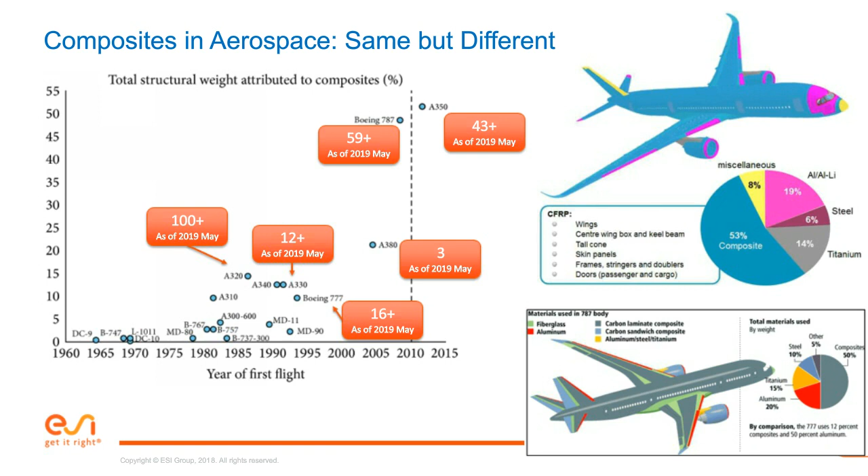Now, I know that sometimes when we talk mass production, and compare automotive production to aerospace production, a lot of times people say it's still a small volume, right? A typical automotive plant is finishing 1,000 vehicles in a day, and a typical aircraft has yet to see 1,000 aircraft being shipped in a year.

But some of the new aspirations of the industry when it comes to the future of flight and aviation, we see already at last year's CES, I saw at least about 10% of the show floor in the automotive and transportation area was dedicated to Bell Flight, and they were showing off their Nexus Air Urban Taxi concept, a vertical takeoff vehicle that they're promising maybe someday will be the Uber of aircraft, a way to ride share and get airborne transportation mobility down to anybody who has enough time to load an app onto their phone and schedule themselves a ride.

Now, maybe that's just a few years away still when you talk to folks about the reality of that. But what that means is that if we're going to turn the corner and start seeing this urban air taxi and personal air mobility happen, we're going to move from traditional volumes of aircraft, where we're talking about high double-digit volumes or hundreds of aircraft a year, to talking about the potential for thousands and tens of thousands of these aircraft having to be manufactured each year. And that's going to mean a land shift is going to happen in the composites manufacturing space.

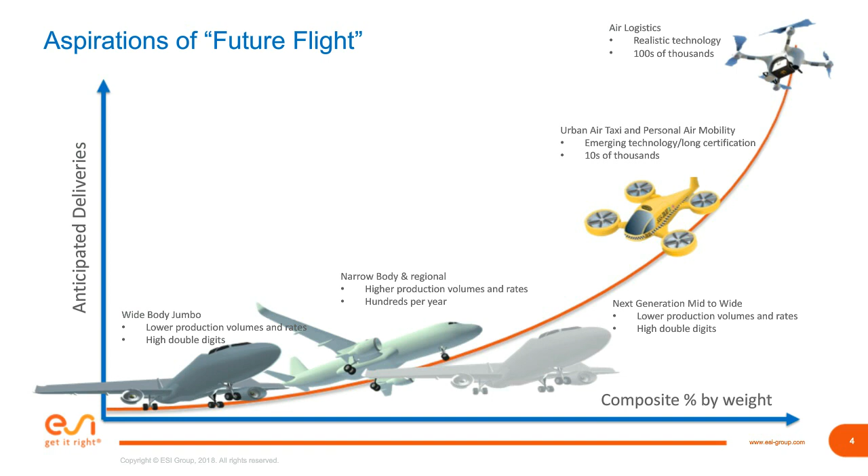And we're talking for them hundreds of thousands of potential aircraft a year, carrying around anything from a 25-pound to a 75-pound payload. And that's really going to make the composites manufacturing industry really have to step up their game in their ability to automate and mass produce those types of products.

Now, a lot of the folks I talk to in automotive, they say, well, you know, composites are cute. They're really nice for those niche vehicles, something we sell on the volume of a Corvette, something we sell on the volume of those Vipers or those GTs, right? Those vehicles, sure, we'll make them out of composites.

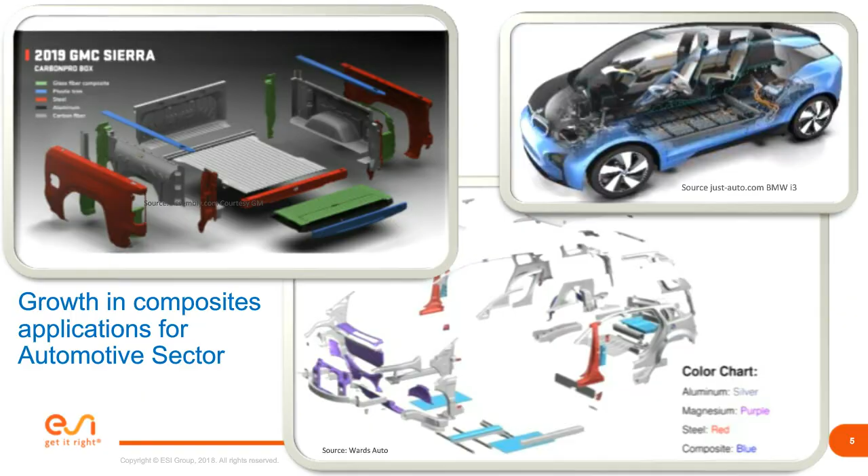So one of the things that we're seeing, as far as the overall trend that's leading to this growth in the composites manufacturing market, is that the previous barriers to wider adoption are shifting. We're seeing an increased need for composites in the mass markets, whether it's mass market aviation or this automotive scale of manufacturing.

We are also seeing that the cost-benefit ratio of making things out of composites is increasing. In an internal combustion car, people might say the value of shaving a kilogram off the car is approximately 50 cents to $1 per kilogram in overall value to the consumer. In the aviation industry, for every kilogram shaved off the airframe, we're talking about $5 to $50 per kilogram of value.

What we're seeing is the convergence of those two numbers getting closer to each other, so now in the automotive industry, as we move towards greater electrification, there's much more financial benefit to the car maker for shaving that weight.

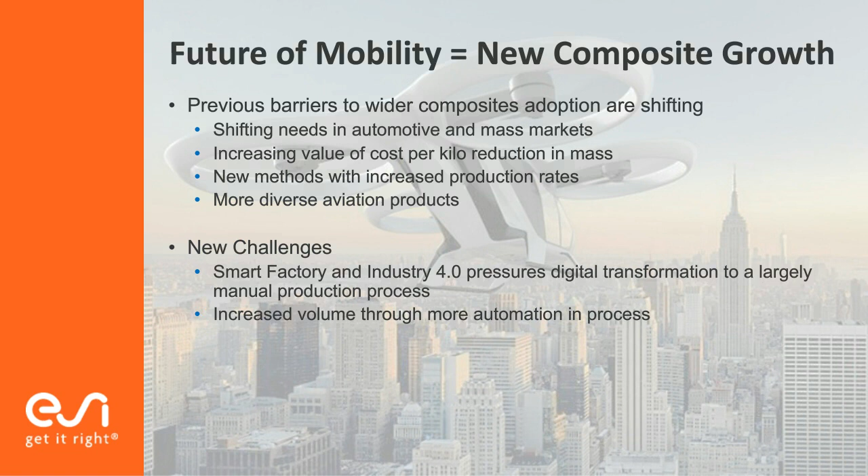It turns out that when you start doing this manufacturing engineering, you might find out that the way the fibers and the resin interact with each other does not end up being exactly what you envisioned for the original product design. If that happens when you're doing your manufacturing piloting, you have to go back to the drawing board and redesign your product to account for what might really happen in manufacturing.

So then they do a couple of iterations that way, building up these propeller blades by hand, manufacturing them in a manually controlled process, cutting them open to see if they actually delivered the characteristics wanted, and lather, rinse, repeat. Then you go into mass producing these propellers.

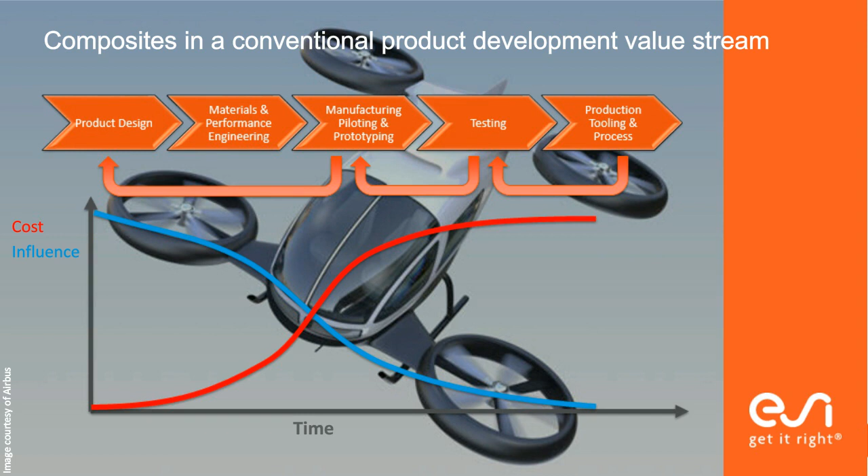So what we're trying to do is help everyone optimize their product performance life cycle. We recognize that one of the ways you try to do this is by almost cyclically or simultaneously addressing product design, materials engineering, and process.

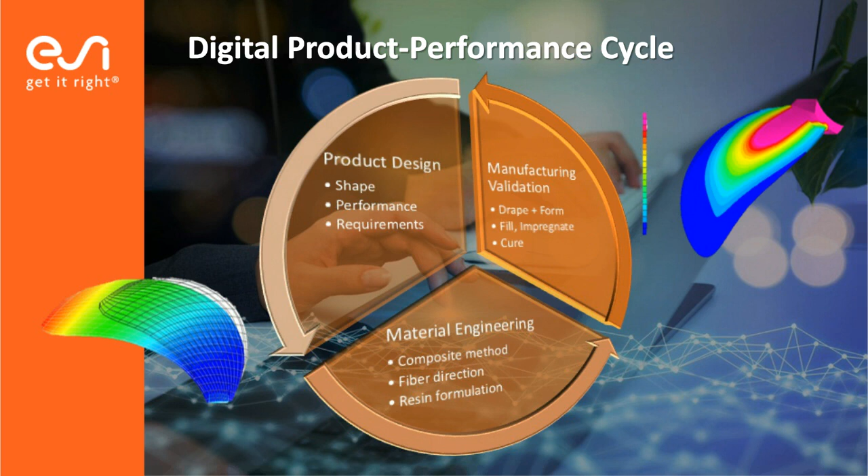One of the things we learned from our discussions with Nakashima is that they recognized that using digital prototyping allowed them to predict how the carbon fibers are being impregnated with resin throughout the manufacturing process, and were able to quickly find out if that gave them the performance results they were looking for. This really allowed them to streamline their product development process, because they no longer had to make every blade by hand, cut it open to see if it was manufactured properly, and repeat that process before they could start physical testing. Instead, they were able to achieve that all digitally.

So just a quick overview of the different types of composite processes we're going to focus on today. We're focusing on CFRP, which is carbon fiber reinforced plastic methods. There are two types of processes commonly used in this kind of manufacturing operation, and many of you on the webinar probably know this better than I do, but we'll go through it anyway.

First, there's what we might call pre-pregged or pre-impregnated product, where we're taking sheets of fibers that have already been impregnated, or wetted, with the resin. Those are stored in big rolls of pre-preg material, kept at a certain temperature and condition in order to prevent them from curing and solidifying into the final product.

Then there's liquid composite molding, which you might know as RTM, resin transfer molding. Then there's compression resin transfer molding and vacuum-assisted resin transfer molding, different ways of trying to infuse dry fibers or dry fabric sheets with liquid resin to get that process.

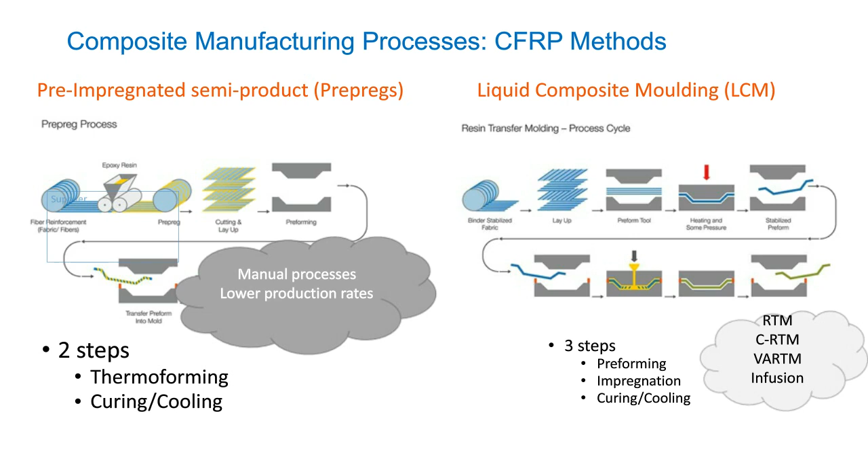This was very nice for some of our larger applications and low production volumes of certain composite parts. However, one of the challenges we face is that these processes require long-term temperature regulation, whether it's keeping these fast-curing pre-impregnated sheets cool so they don't cure ahead of time. That means for a long time we're storing those sheets in giant refrigerators and freezers in order to prevent them from quickly aging or curing to their final strength characteristics.

On the other hand, we have materials that have to sit inside autoclaves for a lot longer to reach an elevated curing temperature, and those parts are also going to require a long production time. So as we've tried to ramp up and reach larger volumes for these pre-preg type processes, it turns out that material science folks working on these new processes are always trying to balance the challenge that the materials we use to cure faster, to reach higher production volumes, are rather volatile. They're going to change in their chemistry makeup over time if we don't control their temperature properly.

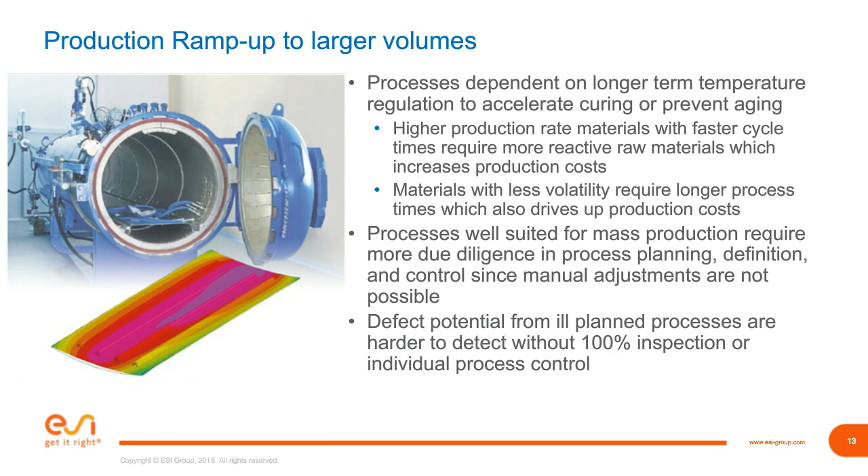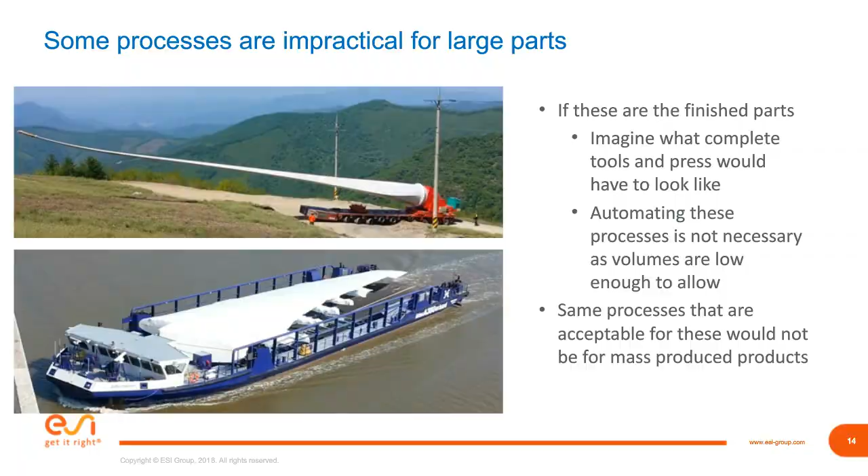So when we think about this product performance life cycle, we do have to make decisions about the materials we select and the manufacturing processes we're going to use to develop them. We have to make those decisions very, very early. It's impossible to design a brand new product with the intent to make it out of composites if we have not already validated or have confidence that the manufacturing process is even going to ever deliver those products to us, right? So if we're going to mass produce something for Airbus, right?

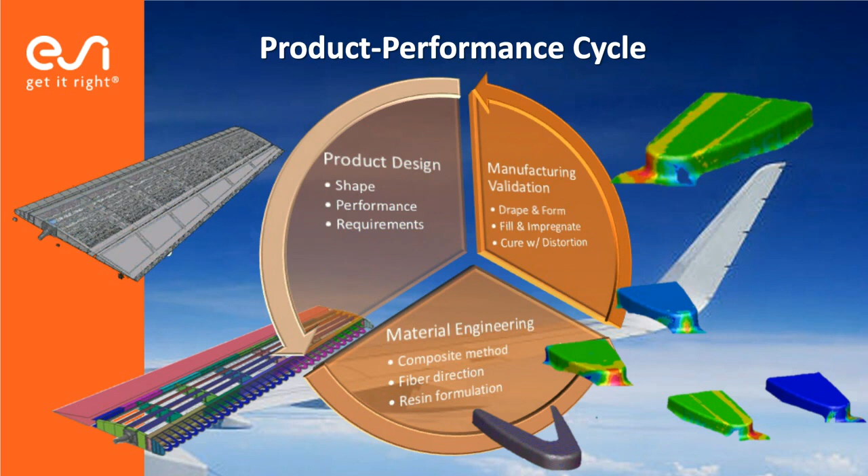So this is, I believe, a section from a wing front of an airplane. Is that correct? A wing? Yeah, right? Reinforcement strut, if you will. And so this would be the rib cage of the wing, if you could imagine. These are going to be made out of flat patterned material that would be pressed into its relative shape, and later on there's supposed to be an animation built there. I love it when a plan comes together.

But what if that closed corner was a critical attribute of that product in order for it to do its job? So whether this is a section through a wing, whether this is part of a reinforcement for a car or an airplane or maybe for one of those drones...

We really have to know, is it possible to redesign the product to accommodate this manufacturing mitigation? Because if it's not, and we know that there's wrinkling in the corners, we might have to totally rethink our entire manufacturing design as well as product design.

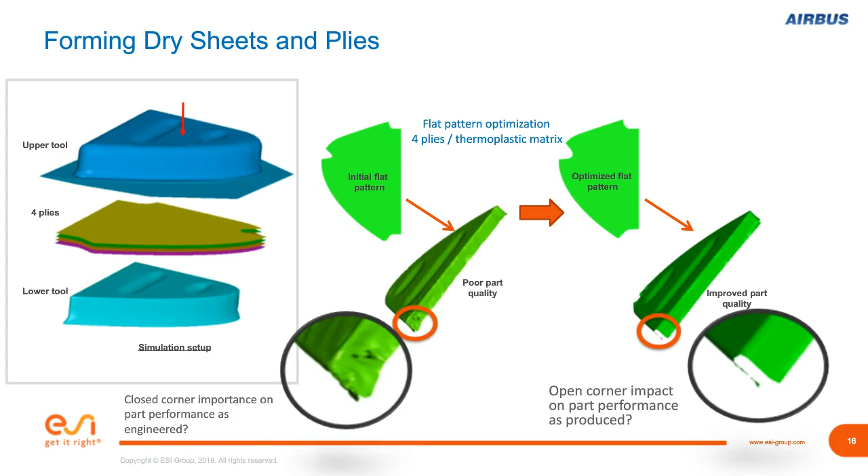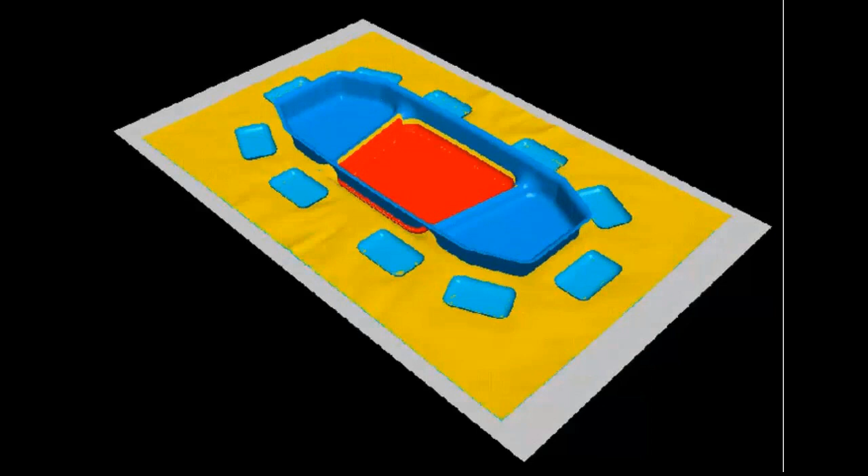So here's just a quick simulation prove-out of the forming of a wing box section. If this is a wing box section for an aircraft, we want to be able to validate whether or not the tool design for forming this box section is going to allow us to reach the appropriate shape of the product as designed.

Given the fact that we have to take dry pieces of individual plies of composite material and get them to form without having that buckling and wrinkling in its shape.

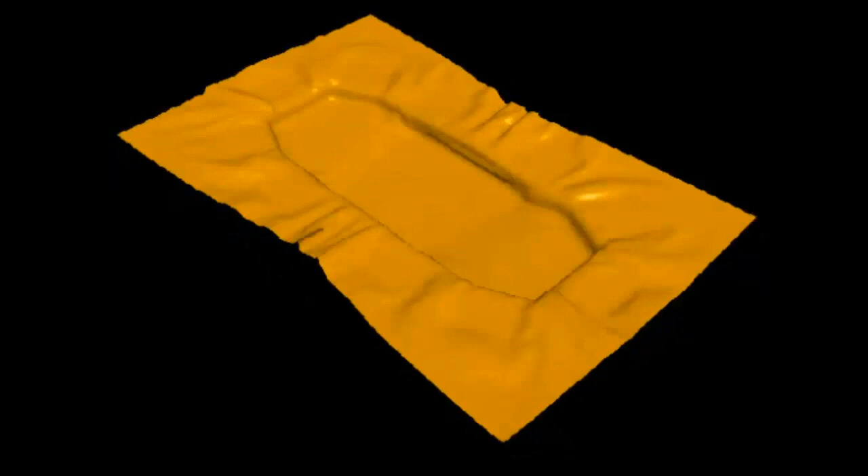That was a simulation with the tooling visible. Now we've just made the tooling hidden from you so you can see a little bit better. But in this case, we're able to validate whether or not the product characteristics, the shapes that people wanted...

A critical thing about carbon fiber reinforced materials is that not only is it the shape of the outside of that product, but also the alignment of all of those individual fibers that are woven through that entire product shape. So it's those individual plies of that product weave, in addition to the resin, that deliver the final product characteristics. And we need to make sure that those things all line up properly.

So it's important for us, if we're creating new products, that we do validate those manufacturing processes before we get too far down that product development time cycle.

Because it might get too late for us to try to rethink what this wing box looks like if in fact we can't make this out of - I was lying earlier, that's thermoplastic, thermoforming sheets, right, as opposed to dry fibers. So this would be a pre-impregnated process, right?

But in this case, you can definitely see that that wrinkling, if that's going to affect my product performance around the edges, I would have to account for that in the product design in the end.

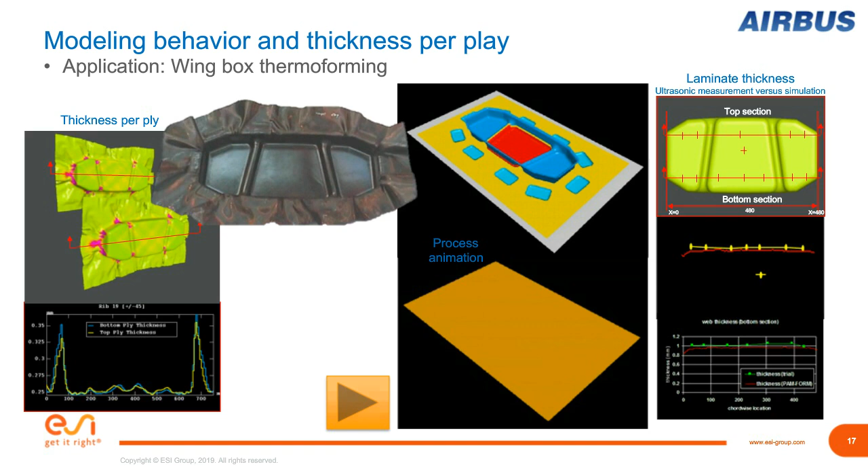So the draping and the forming of these either pre-impregnated sheets, or if this is with dry fibers, dry sheets, it's really important for us to know that we're delivering the final product characteristics based on the natural tendency of these dry fibers.

To orient themselves or to create shear in those fiber weaves. And this is a critical part of every new product design. And we have to make sure that we can prove that as early as possible.

So in this case, Airbus and the Eurocopter projects, they were taking a look at how they could try to use this as a dry fiber process, right? That we're going to later take these dry fibers and try to impregnate them with the carbon or with the resin.

And we want to make sure that prior to that impregnation, we already know what are those sheets, what are those alignments of those fibers going to be like inside of that structure.

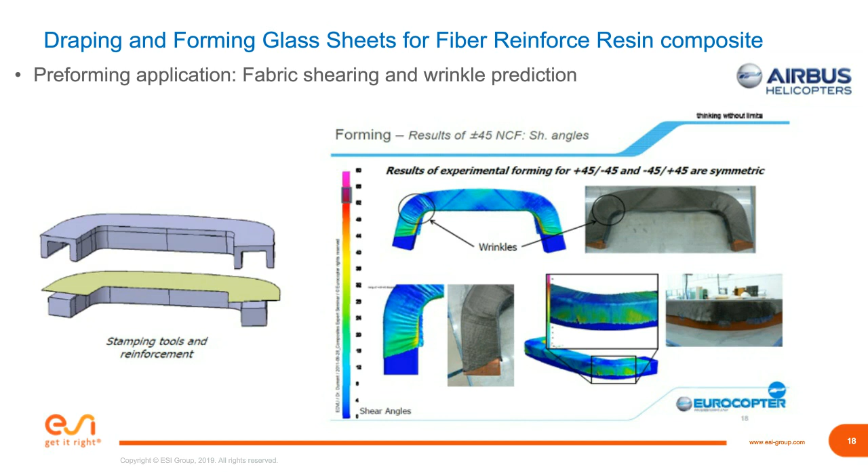So here's another example of just how we can use computer analysis to predict the behavior of those sheets during the forming process. So in this case, we have a series of dry fiber weave.

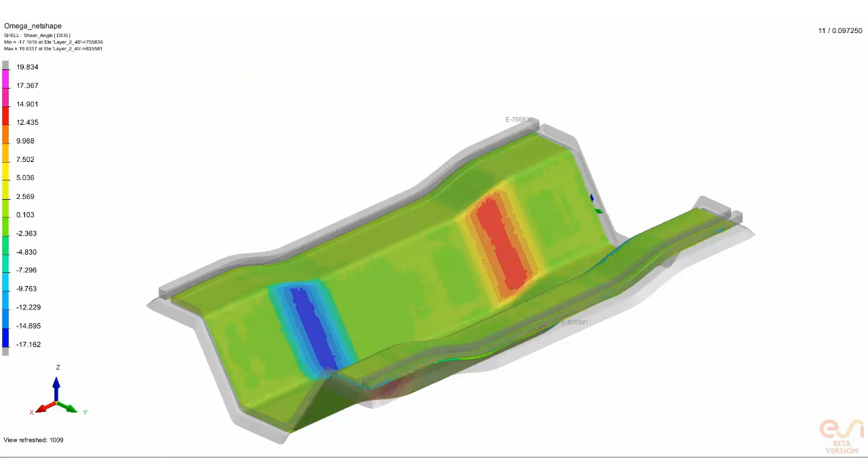Why is that running? We'll try that again. And we're going to fake it. The video is not happening right now.

So just taking a look at this still image, the idea is that we want to validate in this first step of the manufacturing process what's going to happen as we close the tools on top of those dry fabric sheets.

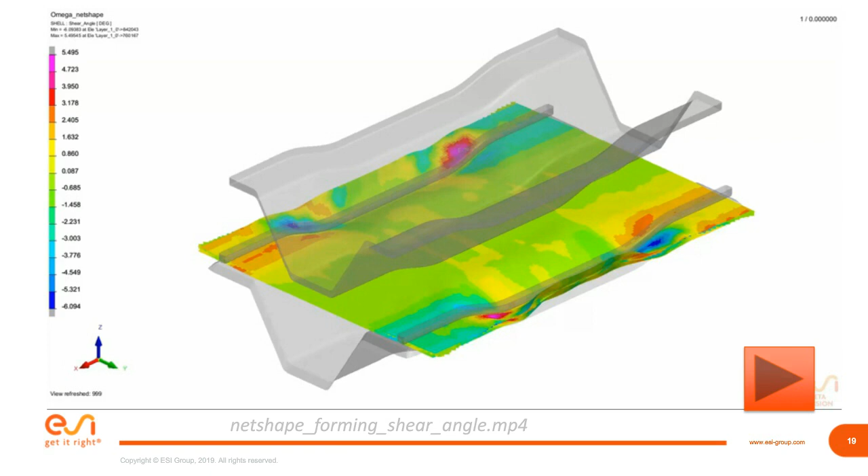So in this case, we can see already that around the perimeter of this part, we have these two, or not really straight, this little saddle shape here, that are helping control how those individual sheets of dry fabric are going to be pushed down into that cavity as the tools close.

And what we want to look out for is, in this case, now we see it, we want to see how much are those fibers shearing relative to each other during that closing operation.

Are we seeing that there's any excessive amount of shear, because that's going to change the alignment of those carbon fibers, and those carbon fibers might not be aligned exactly the way that the product engineers originally anticipated when they engineered this product. And for those minor variations in the alignment of the sheet, we can certainly see different performance of that product.

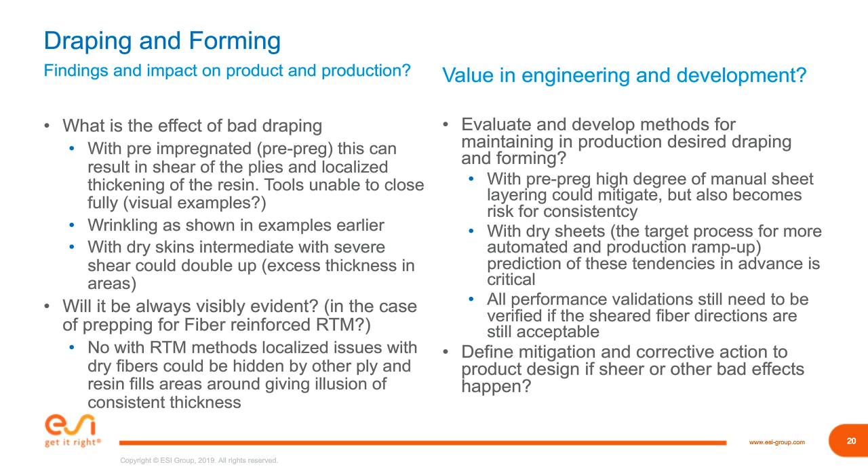So really, the thing that we want to consider is what's going to happen when we close the die. Is there going to be problems with draping, or with the way those fibers maintain their alignment? In a worst case scenario, you could even have uncontrolled movement of those fiber sheets where they double over and wrinkle up inside the tool, preventing full closure and the proper thickness distribution we were counting on. It could even keep the tool from closing and might cause the whole part to not be manufactured the way we intended.

So once we've closed those fibers and sheets inside of the tools and given them the general shape we wanted for the process, now we want to evaluate and prove out how the resin is going to infuse and wet those dry fibers in order to give us our finished product.

And so we always have to take a look at what is going to be the filling time. How fast can we push that resin inside of the die cavity, and will it fill completely before it starts to cure and solidify, forming new polymerized material that could become too viscous to actually flow through those sheets appropriately.

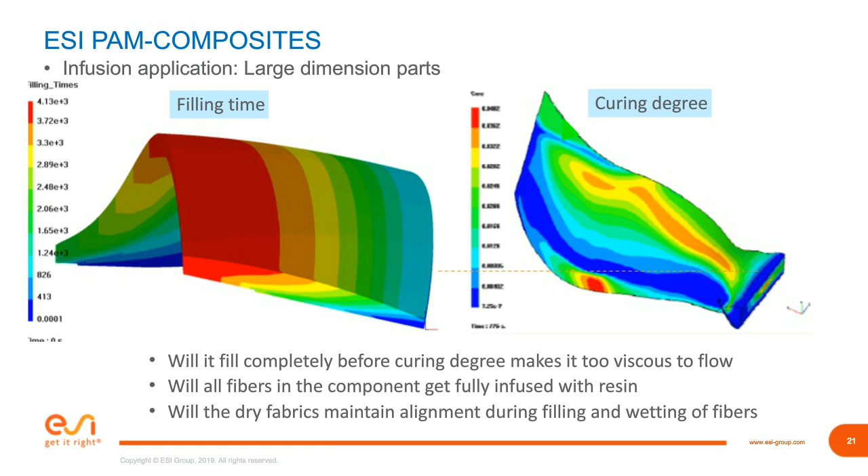So for these large dimension parts, it can become really critical to be able to predict whether we're maintaining that full flow of the resin throughout the product, and whether we're able to predictably maintain the right pressure and the right curing profile.

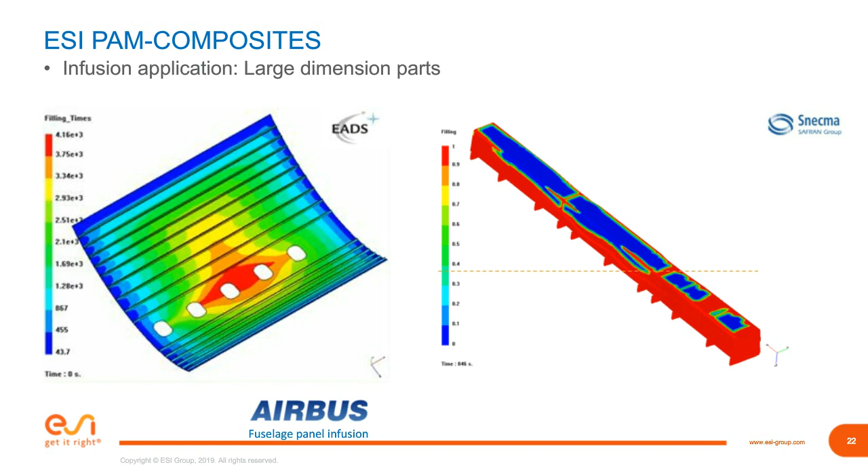So again, we're going to cross our fingers and hope these videos run properly. Here's a video of the simulation of the filling factor, just showing how the fluid filled up that entire cavity where we have the dry fibers.

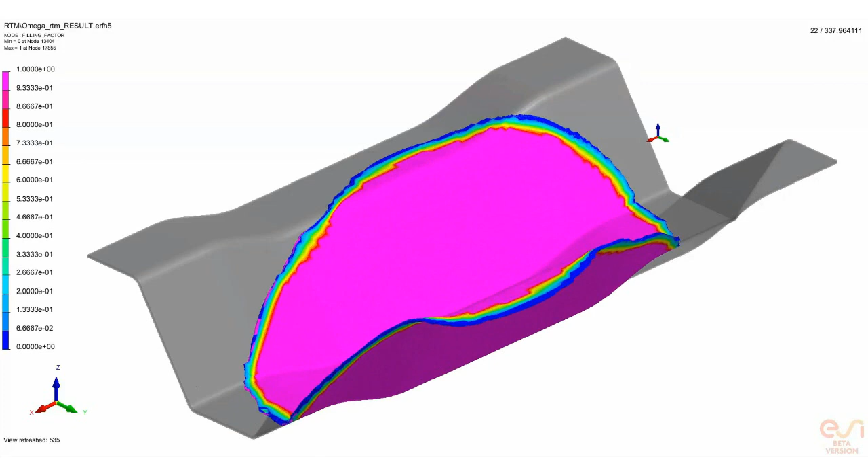So the things we're looking out for are whether there are areas in this product that are not properly being reached by all of the resin, or if it's not getting filled appropriately.

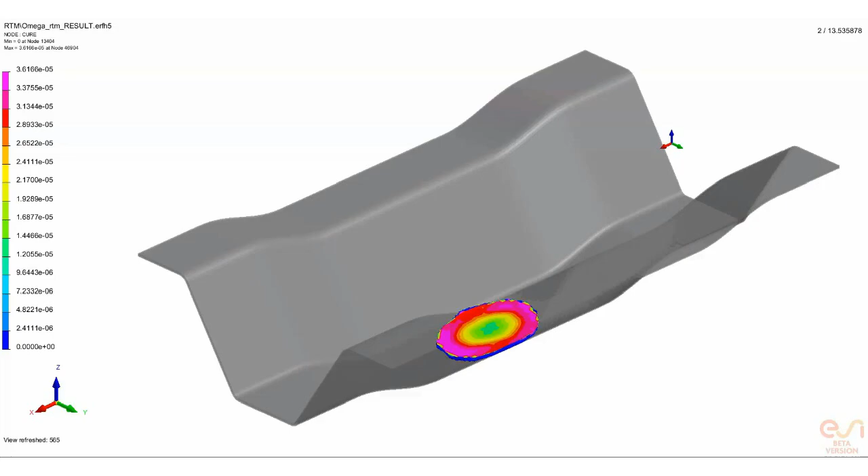This one would be the characteristics of curing. So now, as that resin is flowing in, are we seeing some of that fluid polymerize too early, creating islands or little rocks in the stream of that fluid flow? An early polymerization of that resin could in fact block the planned flow of the rest of the wet resin into that structure, which could also change our confidence that we're getting the product characteristics we want.

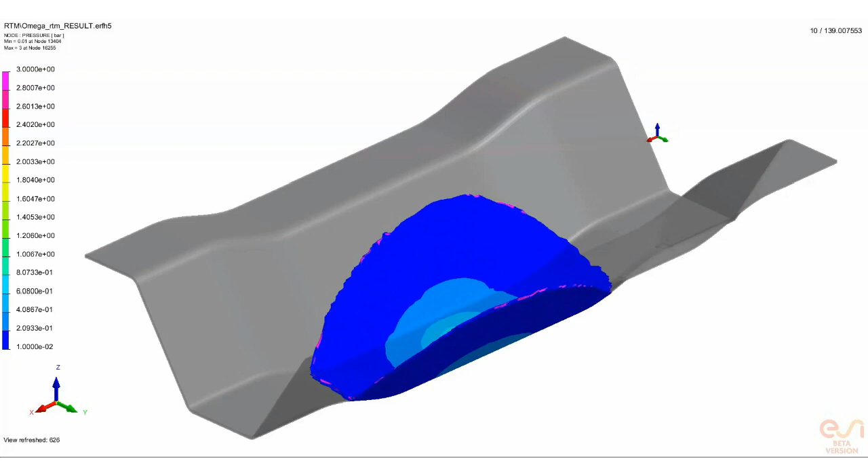And this is a quick view of the pressure inside of that tool as the resin is being pushed through. In this case, if we saw some of that early polymerization, that would cause the pressure to climb inside the tool as we're pushing the resin in. Once the pressure reaches certain thresholds, we lose our confidence that the fibers are going to stay the way they're supposed to during that infusion process.

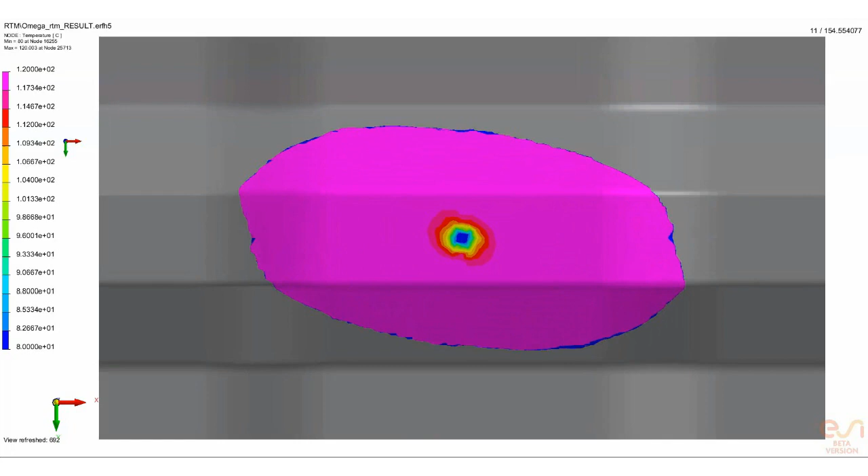And this is just a top view looking at the temperature. We're seeing how the temperature propagates throughout, because in the curing process, some of these resins cure exothermically, giving off heat. We're also applying some heat to try to get curing. This temperature distribution can help shed light on our confidence that we're getting a fully cured, fully formed product at the end of the process.

Then we think about the rest of that curing process, the maturing of that process, if you will - the finished aging of that process, to make sure that it is in fact curing fully to the final strength characteristics that were part of that engineering design.

This is really our way of being very confident that not only was this a highly performant, lightweight product that we saw fit to plan in the assembly of our new aircraft, of our new automobile, but one that we feel is reaching the right performance.

And this is what Nakashima was able to do in order for them to be the first people on the market globally to bring a fully composite marine propeller, or commercial marine propeller, to market. Prior to that, no one was building propellers at this scale from composite materials. As a result, they're able to make a stronger, more performant, more quiet, and more efficient propeller because of the characteristics of the composite parts they're manufacturing today.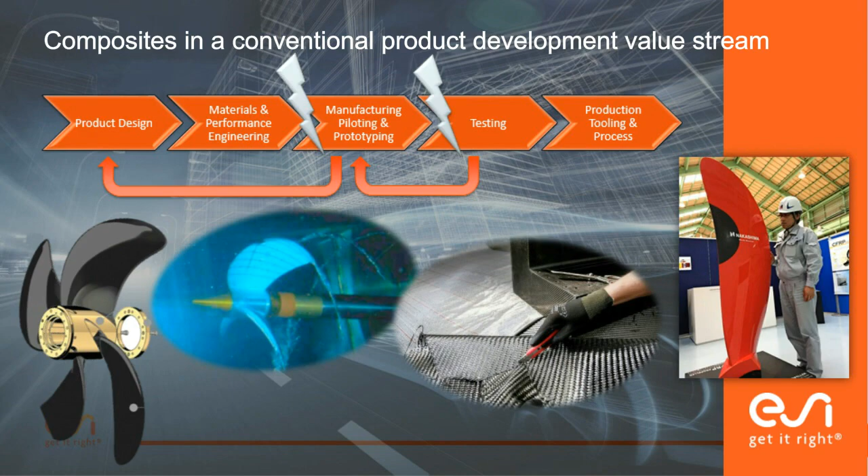So our goal has been at ESI to provide tools that allow people to engineer their products throughout this entire cycle, considering not only the performance of the products, but what it's going to be like when we try to form the part, infuse it with the resin, cure it, and also predict if there are any distortions caused in the part as it completes the curing process and reaches those final performance characteristics.

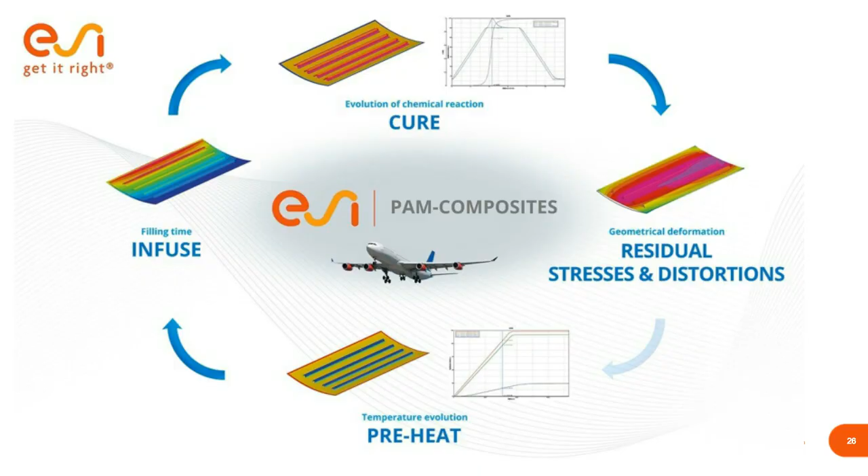So we've had recent success where people have been using ESI composite engineering products in order to properly predict that this was a feasible product design for this body side of their bus that they wanted to manufacture. In this project, they were able to fully simulate the RTM process that let them secure the bus design and optimize their process. That way, they're able to know not only the manufacturing process parameters, but also things such as the injection time, the pressure, and the mold, and fine-tune their mold design to have a high level of confidence that they could mass produce this vehicle for their customers.

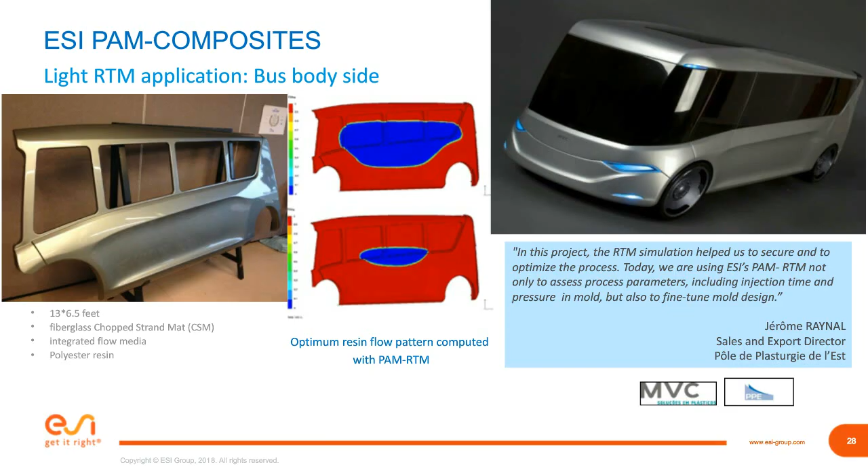So that's what we've been doing here at ESI Group, and how we've been trying to address, not only composites, but throughout the entire manufacturing - whether it's automotive, aerospace, marine, or energy industries - helping people design products and conduct design checks of their processes.

Replace the tests that are normally used to validate or certify their products, and replace the need for prototyping products or prototyping tools, in order to make smarter, more informed engineering decisions and make your prototypes more smart.

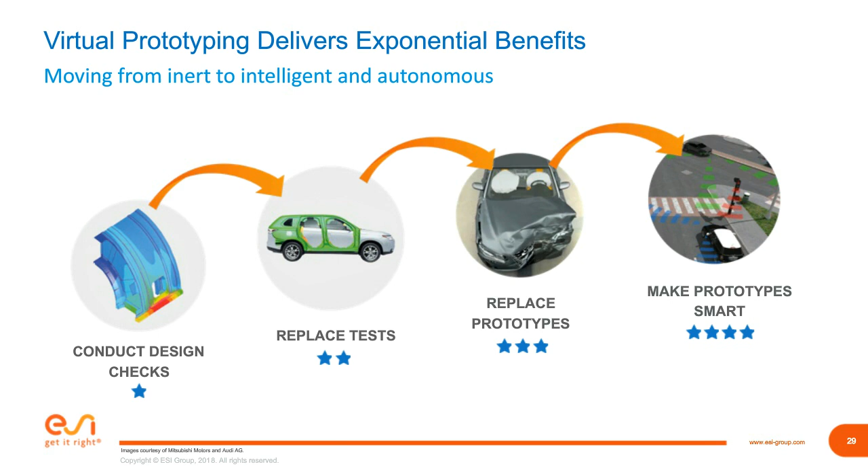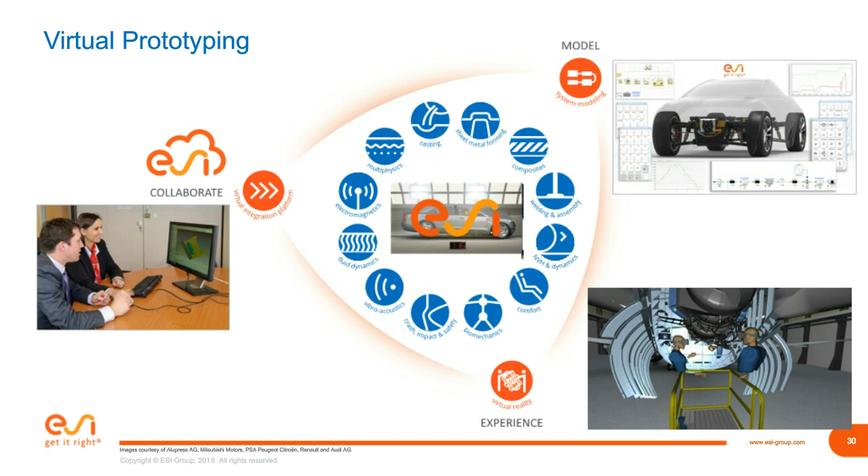And we've been doing that through different ways of helping people model their individual processes, whether that's the manufacturing process or how that product is going to behave in its final end-user performance, and trying to encourage the modeling, collaboration, and experience of those products well ahead of time.

And that's what we've been doing in composites, and at this time I think I should probably stop gabbing and open up the microphone for any questions that people might have.

Thank you, Eric. That was very fascinating - and an interesting introduction to composites.

Thank you. So let's see, I think we saw - I'm looking at the questions board right now, and there was a question from Paul Kumler from KTM Solutions, who wanted to know about the general aviation market, because Beechcraft is using composites in their Starship and some of their other products. And the question is, absolutely, right?

Courtney's typing in what I'm saying here, so I've got to be careful.

But of course, the general aviation market, these different manufacturers at the scale of Beechcraft, scale of Gulfstream, and some of these other manufacturers, they've been using composites for quite some time. There's still quite many of them still operating on that scale where they're not using highly automated processes. In fact, in SME right now, we've been talking quite a bit about forming a new technical working group inside of the composites manufacturing technical community to address this challenge of how do we further automate and optimize that composites manufacturing process.